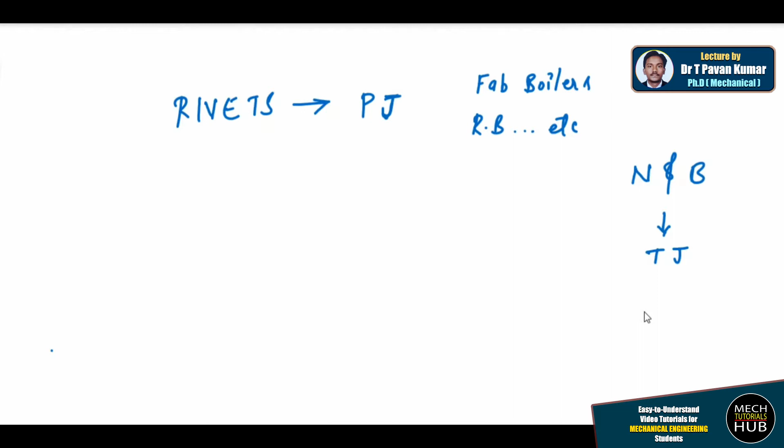Now coming to temporary joints, we call nut and bolt arrangement as temporary joints. This we know. Other than that, if I want to join two sheets together to work like a single component, I can use the welding option. Weld is one more option available. For example, if this is sheet number 1 and this is sheet number 2, if I would like to weld these two by an option called welding, this welding will withstand up to some level. The strength of welding may not be so high when compared to riveted joints.

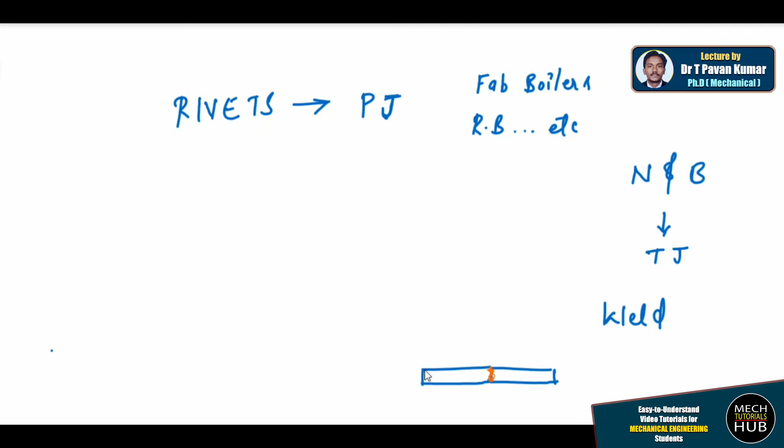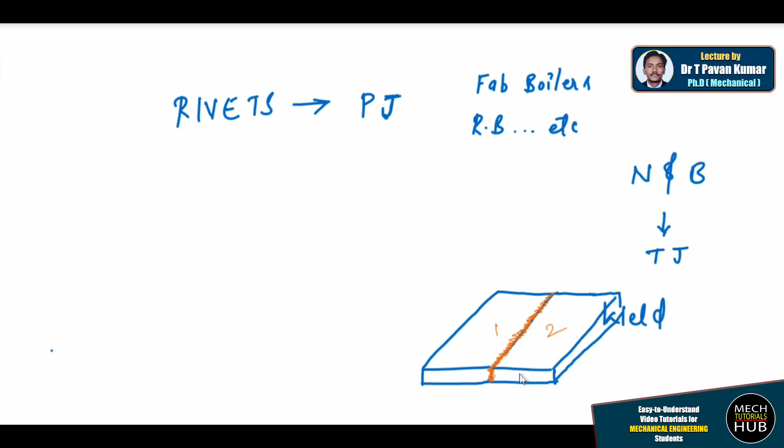Now here, if I could remove the chip out of whatever welding is done, let me show you a 3D representation so you'll understand better. These are the two sheets. This orange color one, let us consider this as the welding portion. These two sheets are joined together with the help of welding. Now we can chip out this particular filler material. When you chip out the filler material, the strength in between these two materials comes down. So in such a scenario, if you chip out, you can disassemble or disjoint these two materials 1 and 2, so we can call this also a temporary joint.

So here our idea is to know about the riveted joint, which is a permanent joint. Try to concentrate now. Coming to rivets, you need to have a clear idea about what exactly we are going to learn. We are going to learn about two important things: number one is joints. Number one is lap joint, number two is butt joint. If you are joining the session now, lap joint and butt joint.

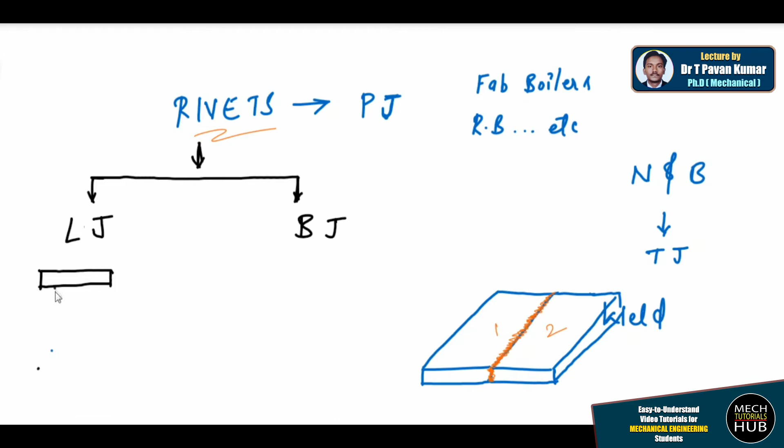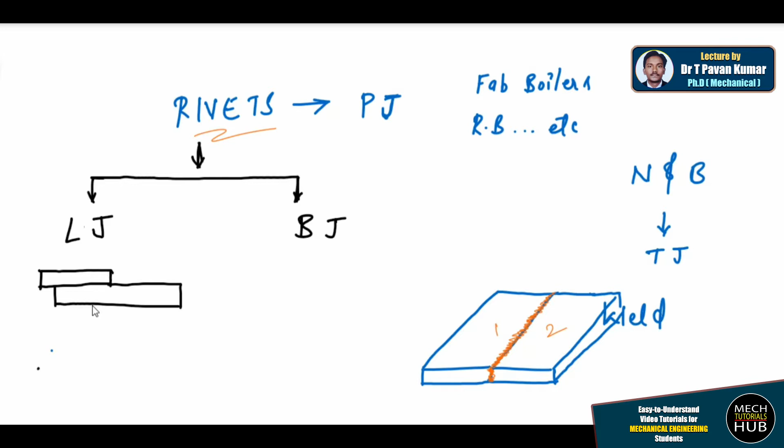What is lap joint? I would like to join these two sheets, sheet number 1 and 2, in this arrangement. Sheet number 1 is mounted over sheet number 2, or 2 is falling below sheet number 1. This we call a lap joint, when one sheet falls over the other. One sheet is placed over the other, we call it a lap joint. Similarly, if one sheet is placed side by side with the other, this we call a butt joint. This joint is called a butt joint, side by side. These are the two types of joints we are going to learn, and the related specifications.

Now whenever I call it two sheets, try to imagine three-dimensionally, something like this. In this three-dimensional view, we are not bothered about the length of the sheet, we are not at all bothered about the length of the sheet, and also we are not bothered about the width of the sheet. Our idea is to represent a simple sheet irrespective of its specifications, followed by the arrangement of rivet. Arrangement of rivet is very much important. So try to imagine three-dimensionally, something like this.

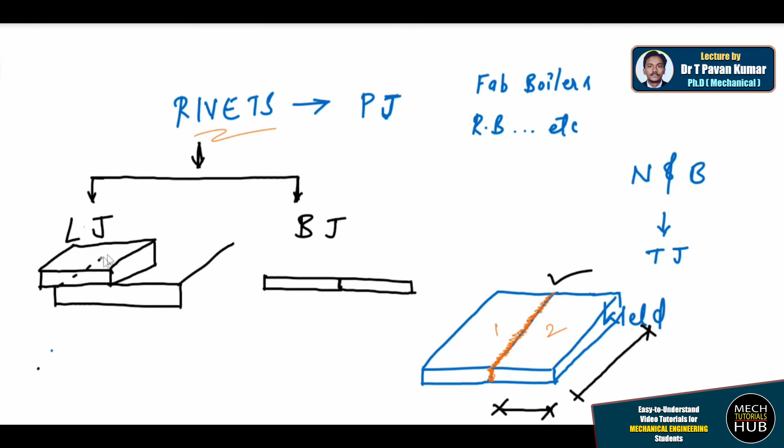This is sheet number 1, and maybe this is sheet number 2. Here ends sheet number 1, and sheet number 2 is beyond sheet number 1, the length is much higher, something like this. This is the visible portion. Try to understand, three-dimensionally, when you imagine things, then only you'll understand the complete arrangement of riveted joints.

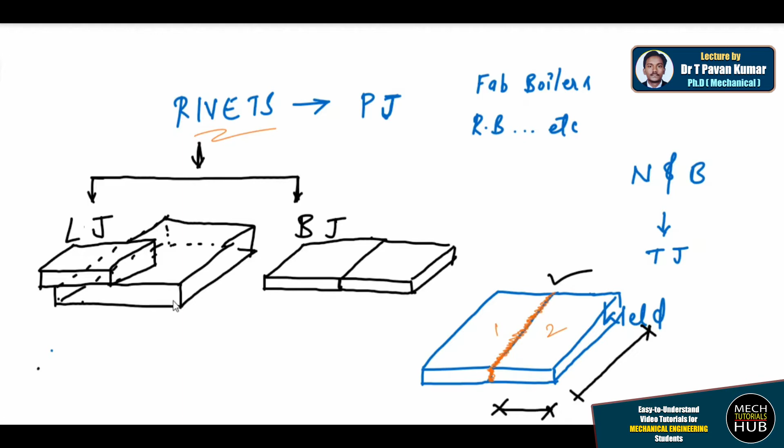Something like this. All right, now let us concentrate on a lap joint. What exactly lap joint is all about, and how we need to deal with this particular lap joint.

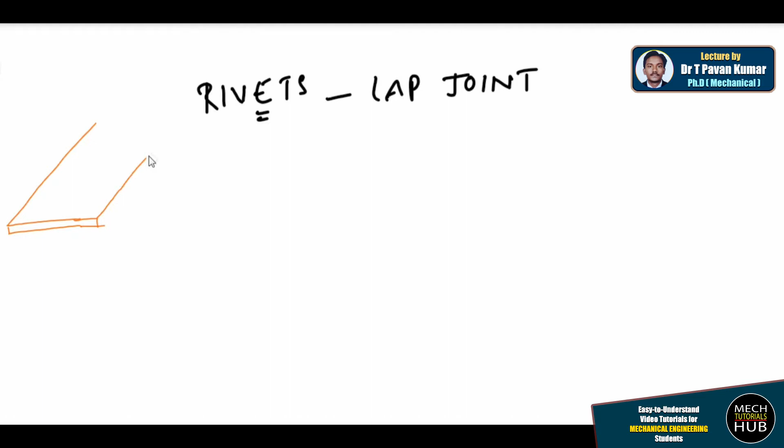All right, let me clear this window. Now here our discussion is all about a lap joint arrangement. Now for this session, let us consider this as sheet number 1, this is sheet number 1, all right, and this is sheet number 1, and the next one is sheet number 2.

So I would like to join these two sheets for some application. Maybe the surface where you stand, the boarding surface of a train or bus. Now it is completely, the surface is completely made of riveted joints. The sheets, the aluminum sheets or whatever sheets they use, those are made of riveted joints only. So now I would like to join these two with the help of a rivet and lap arrangement. For that, what I try to do, I'll just increase the thickness.

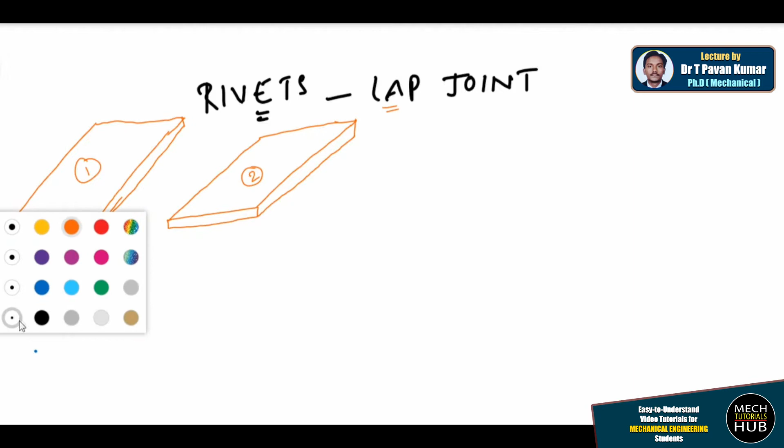Now when I view this particular sheet from the front, we can't feel the length of the sheet, we can see only the rectangular cross section of the sheet. So that rectangular cross section is visible, and when I place one over the other, those two are going to appear something like this.

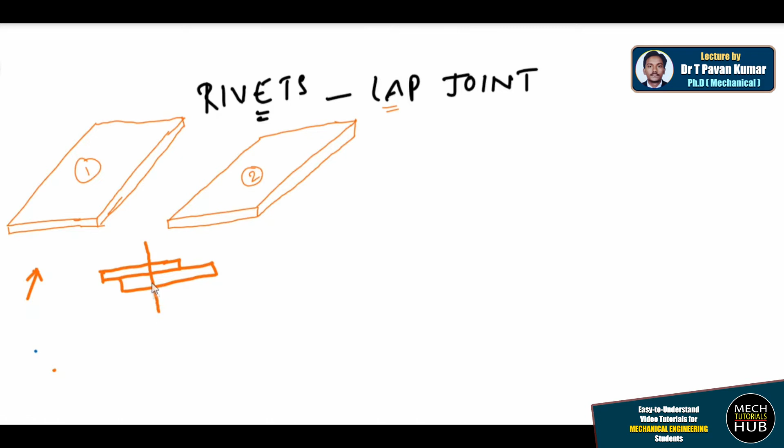Now if I would like to place a rivet over here, from this axis, the distance to sheet number 1's extreme end should be 1.5d. Similarly, from this extreme end to the center of the rivet, it should be 1.5d again. So what I try to do is draw an axis line.

I'll just try to draw a simple axis line. Conventionally I'm representing it, not using any scale. Now here, as we know, from the axis it should be at a distance of 1.5d. So what I try to do is simply measure a distance of 1.5d from here. If that is 1.5d, the sheet should end up there.

This is sheet number 1, and this is the other side. The other side length could be any distance, so I am making it zigzag. It could be of any distance, and again from the vertical to the other side we need to measure 1.5d. This distance again is 1.5d.

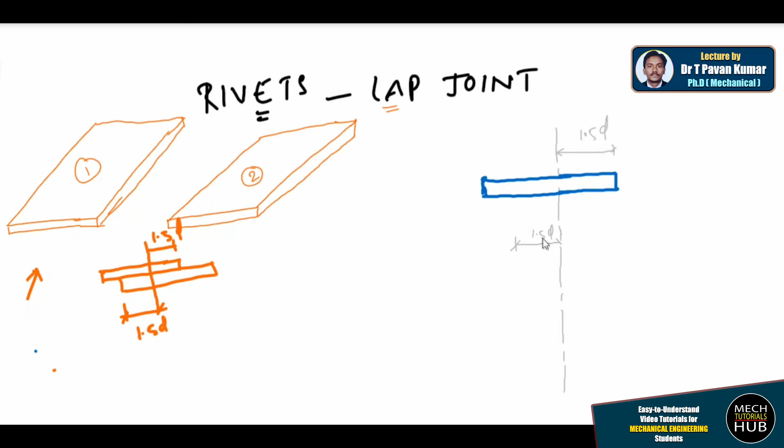So I'll just try to zoom the area. If that is the case, again what I do, wherever this line drops, from there I'll try to measure a distance. The other side could be any convenient distance. This side could be any convenient distance, and also this side is any convenient distance.

I am placing one sheet over the other. These are the two sheets, placing one over the other. After that, with the help of a drill bit, I try to drill a hole from top to bottom. Let us imagine this as the drill bit. I'm drilling a hole. Now a hole is drilled from top to bottom.

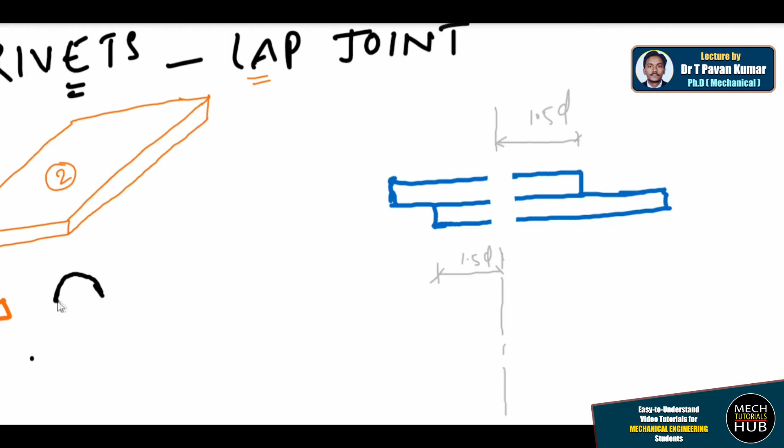Now let us consider this as the snap headed rivet. This is how a snap headed rivet is going to be. Two lines are tapered. Now here the dimensions: 1.6D is the diameter and 0.7D is the height of the snap head. Height of the snap head is 0.7D and 1.6D is the diameter.

So these two specifications have to be maintained to place the snap headed rivet over here. So if that is the case, feel that I am lifting this particular rivet, placing it over from the top. With respect to the axis line, I'll plan 1.6D by 0.7D to place it centrally from here with respect to this point, which falls exactly on the axis line.

I'll try to place a semicircle. I just try to place a semicircle, then I'll measure 1.6D as the diameter, then I'll try to cross the curve. Just have a look. I'm doing a construction now, because placing this snap head exactly centrally over here is a tough task.

For that, let me draw the axis line again, which will help me out for reference. Imagine this as the axis line. Now what I try to do is measure 0.7D, 0.7 into whatever the D value given to you in the question. I'll measure that value from this intersection, from this top horizontal of the first sheet and the axis line. From this intersection, I'll measure a distance of 0.7D.

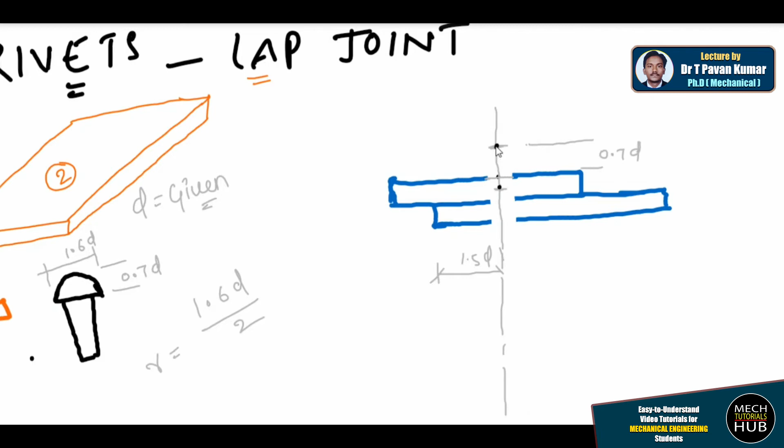Similarly, in a reverse direction, taking this as the center of compass, and from here to this intersection as the radius, try to draw the semicircle, something like this, and a straight line. This is how it goes.

I hope you understood this point, because after considering 0.7D as the height, if you start drawing the curve of 1.6D by 2 from the intersection of top horizontal of sheet number 1 and the axis line, then your curve will definitely go beyond this intersection. So when you draw, the curve should meet both the specifications. What are both the specifications? 0.7 followed by 1.6D. Both specifications mean it should pass through this intersection point. That is very much important. Try to understand this; if you have doubts, you can ask me so that I can explain again.

I'll remove this 1.5D also. Try to remember that this distance is 1.5D. Now, other than this, the shank portion will be inserted here, which is a taper section. Let me just try to draw the shank portion also; later on I'll erase it. This is the shank portion which you could see.

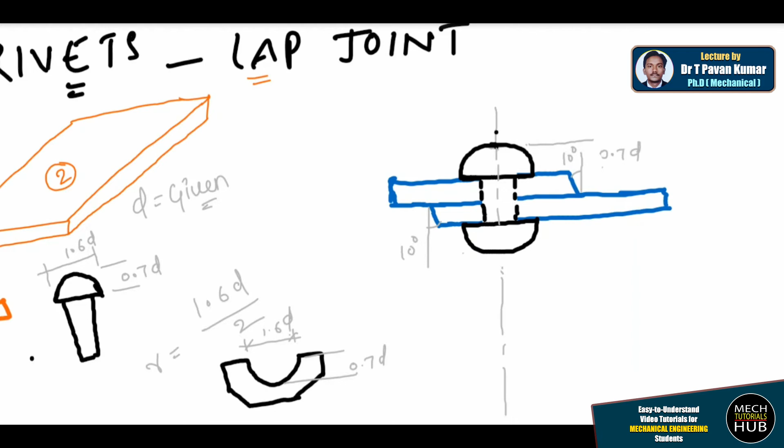Now let me take the projections to draw the top view. Let me make the scale, rotate it to 90 degrees. At every intersection or vertex point, I'll draw the extension projector lines. Here I could see two projector lines; this is number 1, because here there is a taper section, so both are visible. Now this is the 1.6D diameter projector line, starting, and this is the ending.

Similarly, I'll try to draw D also, which has invisible lines. Here also I could see two parallel lines, because it is maintaining an angle of 10 degrees. So those two lines fall side by side.

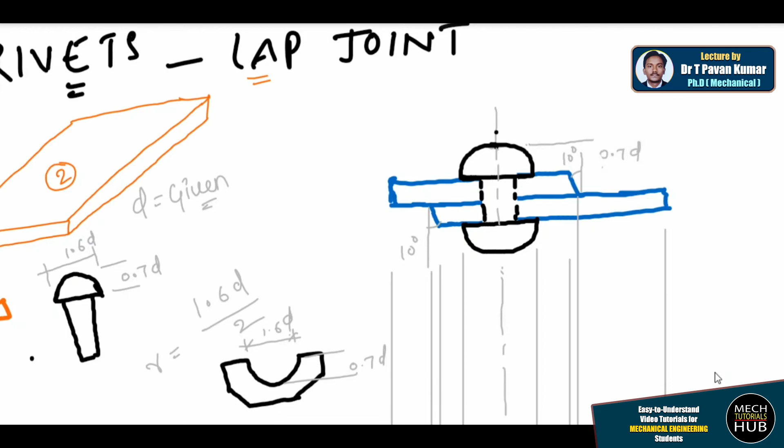Okay, this is how I'll take the projection lines. Let me zoom and show you. Okay, this is how the arrangement is going to be.

Now let us concentrate on sheet number 1. Again I'll take blue color. This sheet number 1 is starting on this line, starting over here. So I'll try to place one zigzag line, then I'll take one horizontal. It is ending up somewhere here.

So here also this line is visible completely from top to bottom, and this line is also visible. Now as these two lines are completely visible and there is a specified distance with respect to the center of the rivet, so no need to place any zigzag line over here.

As we don't know the other three side dimensions, they are not known to the draftsperson, so we'll try to make it zigzag, saying that it will convey the information to other engineers, saying that there is more sheet left over, but we are concentrating on the representation of a rivet. We are bothered about that particular representation.

Better, what I try to do is increase the sheet size so that it is very clear to you. Let me take it beyond. Now this distance is conventional according to your space availability, your wish, you can draw. Alright, this is how it is going to be.

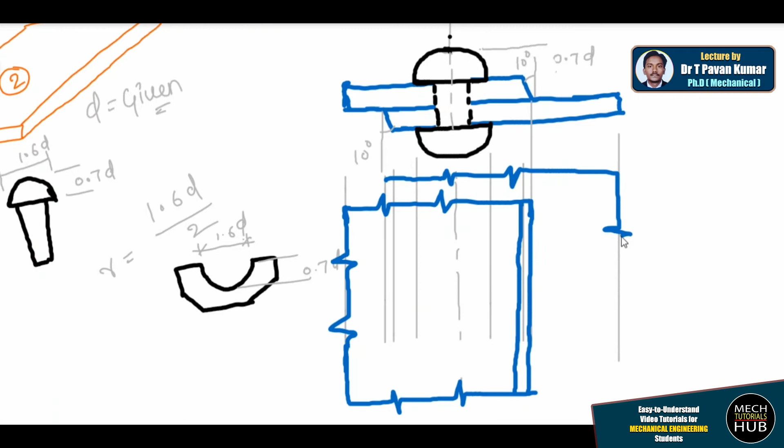Now let me concentrate on sheet number 2. Sheet number 2 is starting at this point, ending at this point, and I'll show you the logic how to draw zigzag lines also. This is how sheet number 1, sheet number 2 is going to be, and this is a dark line.

Here this portion of sheet number 2 is falling below sheet number 1, which is not visible. So let me make it an invisible edge, something like this. Alright, this is how it is going to be. Even this side is also invisible.

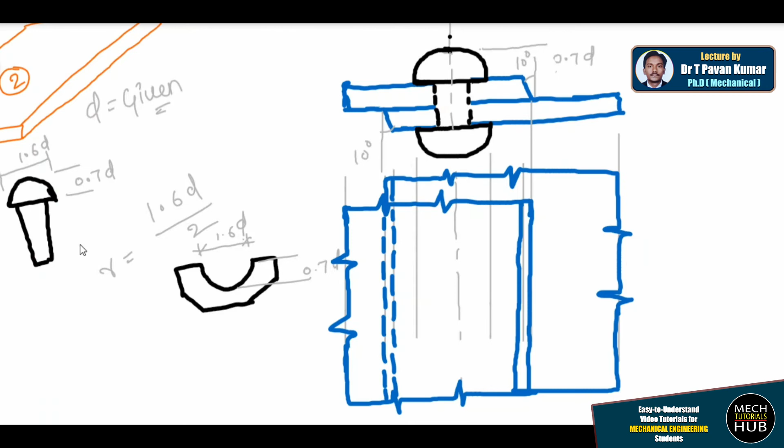Now I have drawn two sheets, but now how to draw this particular rivet in the top view. When I view from the top, what I could see, just let me draw a 3D representation and show you so that you'll understand better.

Let me draw a 3D representation to show you how the arrangement is going to be. This is sheet number 1, this is sheet number 2, and let me draw a 3-dimensional view of it. This is how 3-dimensional it is going to be.

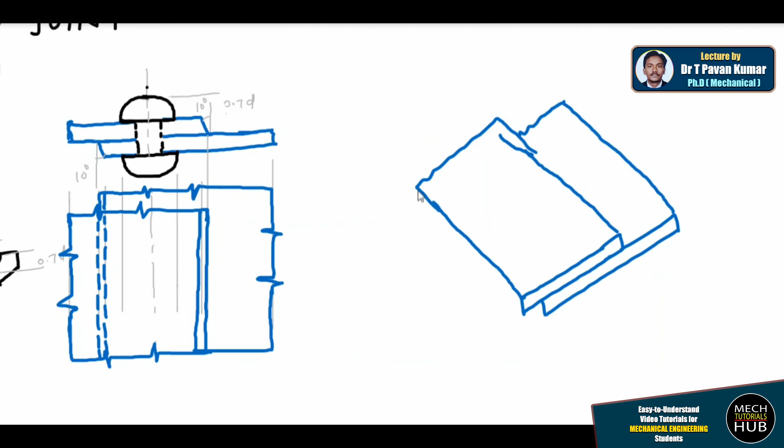This will go far. It is ending up here, so I'm making it zigzag. It is ending up here. Alright, now it is maintaining some thickness, as we are maintaining here, which is T. Alright, this is how the arrangement is.

Now what I did, I have placed a rivet. Where exactly is the rivet placed? Not on the edge. It should actually be placed at a distance of 3d, which is 3d from one rivet to the other.

So what I try to do for general representation is take some offset distance. Here the first rivet should fall, and at a distance of P one more, at a distance of P one more. So the rivets are placed in this way. I'll make it black in color. Now this is the first position of rivet, this is the second position, this is the third position of the rivet.

The in-between distance of two rivets we call the pitch distance, represented with P, which is equal to 3d. It will maintain equidistance throughout the row. You may have 1000 rivets in the row, but we call it a single riveted lap joint. So you may have 1000 or 2000 rivets, but we consider it a single row, whether it is a single row or a double row.

If it is a single row, we call it a single riveted lap joint. If it is a double row, we call it a double riveted lap joint. As all the rivets are falling one behind the other or one in front of the other, not in a zigzag way but in a single straight line, we call it a chain system.

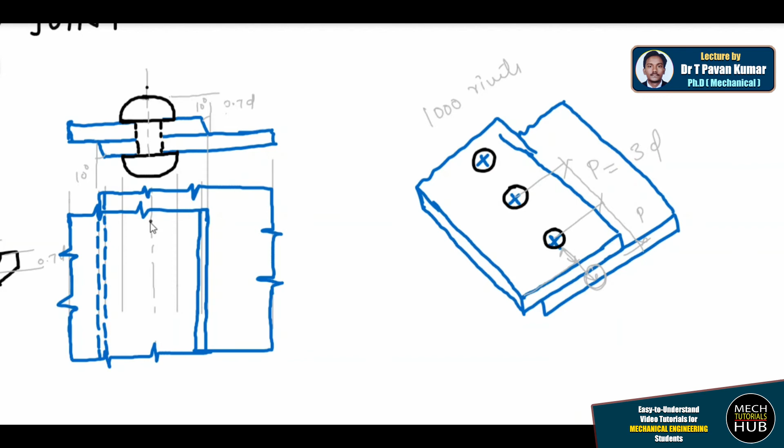If this is the arrangement, these two parallel lines represent the diameter, which is 1.6d. I'll try to draw a circle which will pass tangentially with respect to both the parallel lines. Similarly the other one, something like this. Both should maintain the same diameter, but as of now I am drawing conventionally. It's more or less right, yes, I got it.

Now this is the center. Here the distance needs to be maintained between two rivets. Minimum of two rivets you have to place at any cost, because unless you place two, you can't represent this pitch P, where P is equal to 3d. This distance can't be specified unless you place two. If you place only one rivet that is also fine, but this can't be represented. That has to be shown.

That is important. Now other than this, when I view from the top, what else is visible? This whole diameter d, which is given in the question, is not visible, so that invisible thing I'll try to place with a dashed line, something like this. This is how the arrangement is.

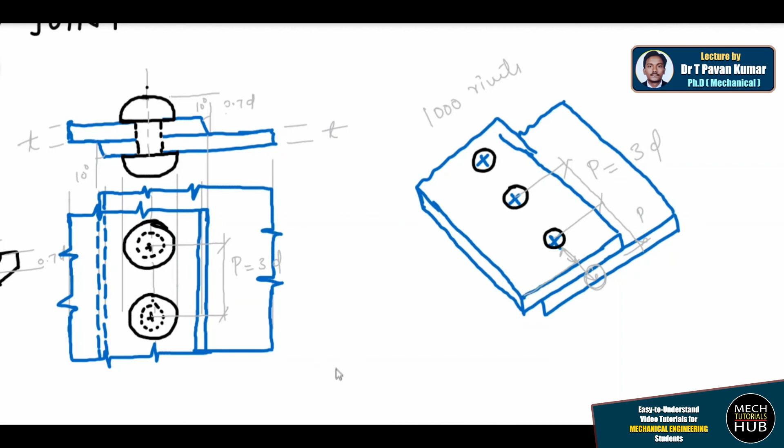Now here the thickness is T, and this thickness is also T. Why it is T and what is the formula of T, that is important. Coming to T, you have a formula: D is equal to 6 root T. Now in the question he might give you the value of D or the value of T. So if for example let us consider T is equal to 4 mm, 6 into root 4 becomes 12. So here the diameter you are going to maintain should be 12 mm.

If that is 12, multiplied by 0.7d will give you the height of the snap head. 12 multiplied by 1.6 will give you the diameter of the snap head. This is how it is going to be.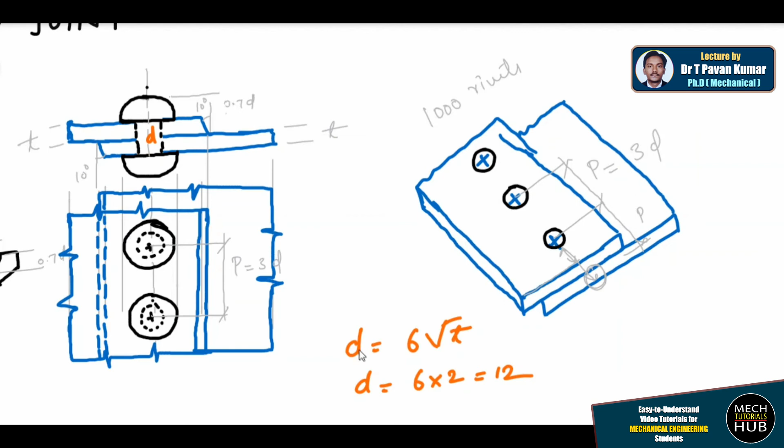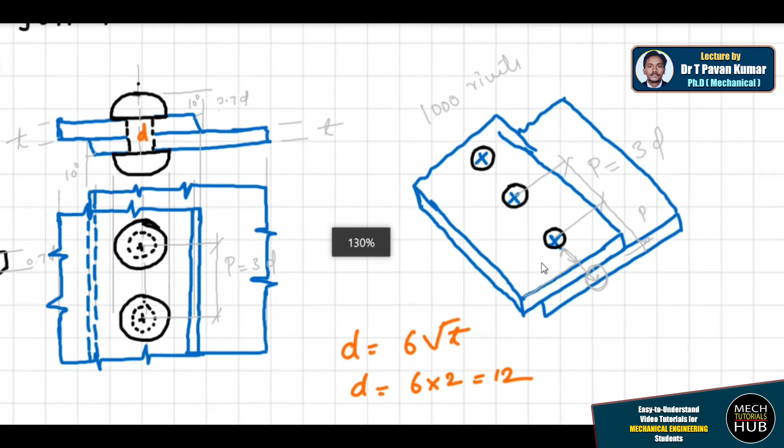This is how the arrangement of a lap joint is going to be. Now in the examination they will directly ask you to draw the representation of a lap joint, chain lap joint, by considering T is equal to some 4 mm or 9 mm or 12 mm, whatever number they give. Accordingly you need to calculate the d value, maintain the angle at the end corners, the snap head height, diameter, followed by the thicknesses T, both should be T. Whenever you deal with a lap joint there won't be any straps.

Here one more thing needs to be understood: what name could we suggest. They may ask you to draw single riveted lap joint, double riveted lap joint, or I just try to name here single riveted lap joint, or double riveted lap joint, or single riveted chain lap joint, double riveted chain lap joint. This is the terminology that you need to understand.

Single riveted lap joint, nothing but single row, should be only one row. This can also be called single riveted chain lap joint, because all are falling in a single line. Double riveted lap joint, nothing but you have two rows. Other than this rivet, you find one more row here, and that can also be called double riveted chain lap joint.

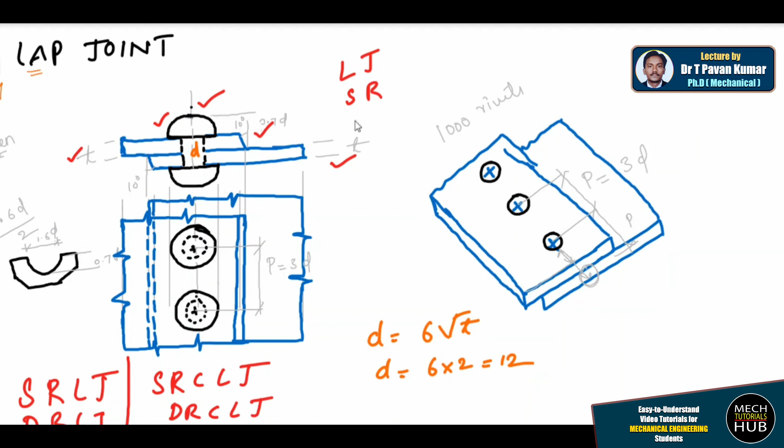Now whatever representation we made just now, we'll try to justify the name with respect to this terminology. As of now we are dealing with a lap joint, that is fine, and there is only a single row, that is also okay. All are falling one behind or one in front of the other, so chain. Single riveted chain lap joint, we can call this single riveted chain lap joint.

Now in your textbook you also find the hatching portion to these two sheets. What does that hatching portion mean? Let me give you an idea.

After riveting both the sheets, I'll try to cut with the help of a cutting line or a hacksaw. For your better understanding, with the help of a machine or hacksaw, I'll cut the model. This portion will be removed, and only this portion will remain.

Now we call this the front view position of the observer. When I view from here, I could see that the complete setup, the complete sandwich, got sectioned at the center, at the middle of the rivet.

Then what happens? Only half of the rivet is remaining. If that is the case, I just want to represent that it got cut, it got sectioned. So from our basic conventional representation of materials, when it gets sectioned, it has to be hatched, something like this, at 45 degrees inclination with a gap of 2 mm.